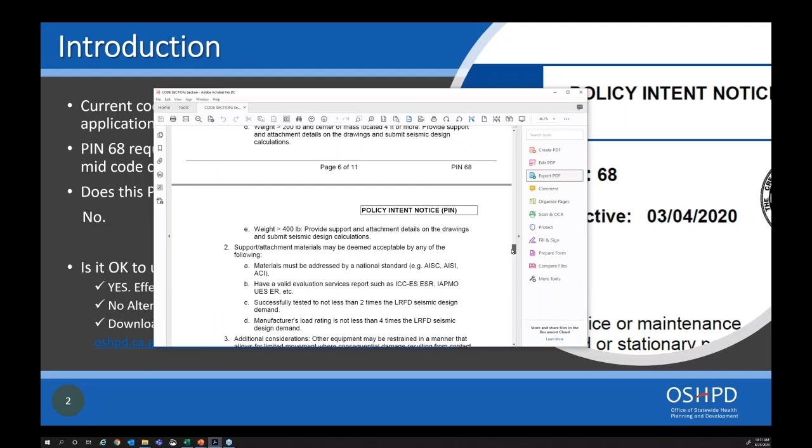So this PIN is not a short one. It's about 11 pages long. So you will see the new definitions, the requirements tied to those definitions, and the explanation of each definition in detail in this PIN, as well as, let me go all the way to the end, there are charts and graphs.

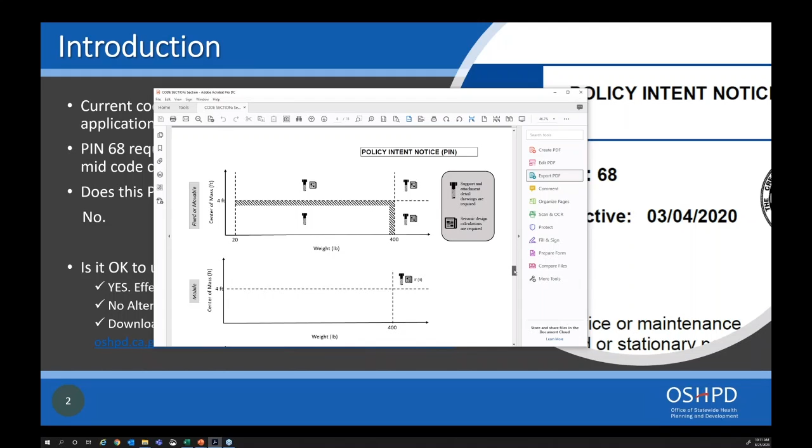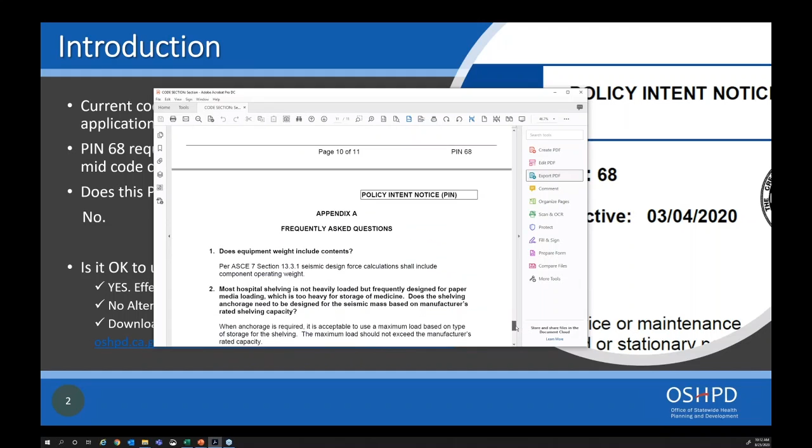So in today's presentation, I will be showing a bunch of these things. The presentation covers all these figures and does not show anything else. So everything in the presentation is actually in this PIN. Also, the example equipment schedule as well as the frequently asked questions that I will explain more in this presentation are at the last page. So this is the structure of the PIN.

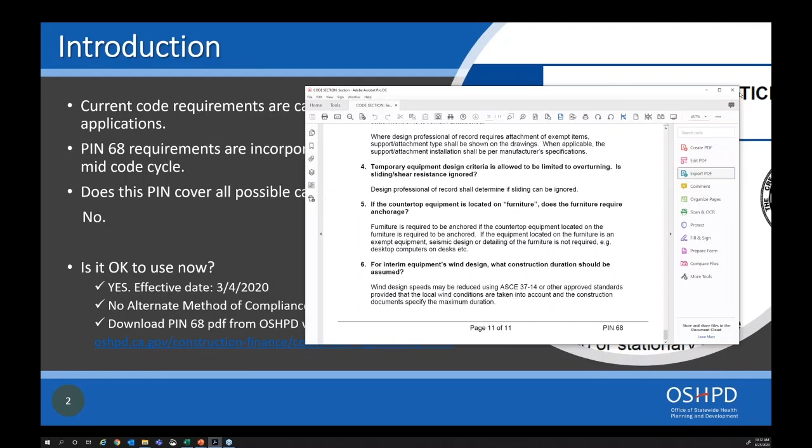Now, just jumping right into the classifications. This PIN brings in new classifications: fixed, movable, mobile, countertop, other, temporary, and interim. You are familiar with fixed, movable, mobile, and temporary. In order to holistically approach the equipment issue, we first revisited the definitions of fixed, movable, and mobile, and we started carving out the definition and scope into countertop, other, interim, and temporary.

So I will not touch the past definitions. This presentation only looks at the PIN. I will not attempt to explain what the old codes tried to say. We're just going to move forward. Now, these classifications are the backbone of what we are trying to do in this PIN.

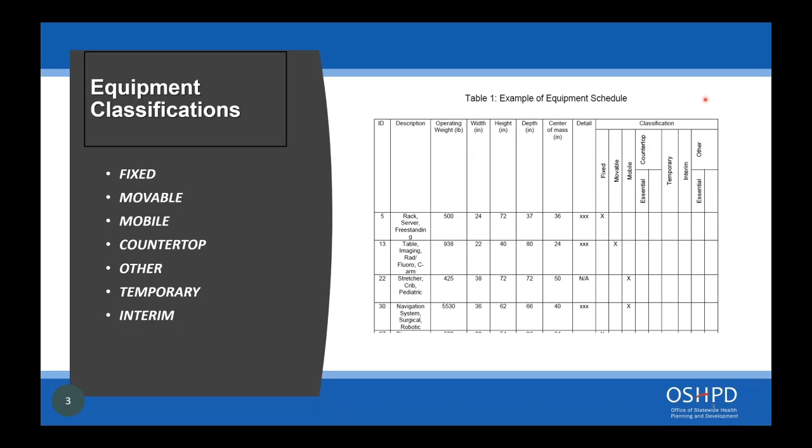So you have the weight, width, height, depth, and the drawing detail. And here is the classification breakdown: fixed, movable, mobile, countertop, temporary, interim, other. And I will come to the definition of essential in a minute. I will re-emphasize this during my presentation: it is very important to put the schedule in the construction documents so that everybody agrees and there won't be any misunderstanding down the road.

As I mentioned, in the new classifications, there are some more terms, such as essential and patient care vicinity. Essential is a new term, and it's basically determined by the facility in consultation with the design professional. Let me read the definition. Essential equipment means equipment the failure of which will significantly impair operations during or after a disaster. The facility shall determine which equipment is essential. So this is where it gets really different than any previous code cycles.

Essential equipment shall also include equipment that is required to provide the basic services of the hospital as defined in this section. So we added this sentence because as a minimum, the equipment that is under the basic services should be under the essential. And this eliminates the question: if the facility says we have nothing essential, then we're going to be pointing out, well, at least you've got to have the basic services of the hospital covered under this essential equipment. And I will come to the point of what to do with essential equipment when it comes into the picture and when not.

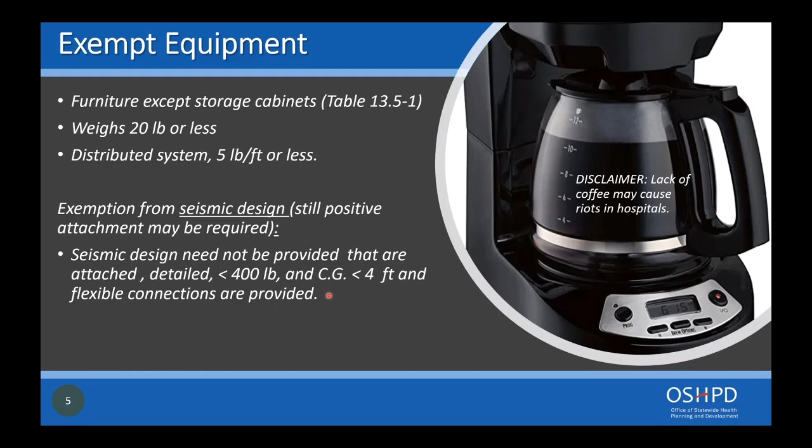All right, the most discussed equipment type classification is really exempt. So we did not change the ASCE 7-16 exemption items. So I'm going to just say the same items, such as furniture or equipment 20 pounds or less, and distributed systems 5 pounds per linear foot or less. ASCE 7-16 also says that these are exempt from seismic design, so you may still need positive attachment. And the famous less than 400 pounds, less than 4 feet, basically gets you out of the seismic design, if flexible connections are provided. So we haven't changed that.

So PIN 68 takes this exempt equipment language one step further. Okay, if it is exempt, what do we do now? What if I show it on the drawing? What if I don't? So we went into that next step. If an exempt item's seismic bracing is shown on a drawing, engineer design and calculation is not required. So if you identified equipment as exempt but still wanted to show it in the drawings, we're not going to ask for calculations. It's already an exempt item.

So let's say you showed it on the drawings, but for any reason you wanted to change the anchorage, change something. That change will not trigger an ACD. So this is an important note to make. For exempt equipment, we're going to treat that as a non-material alteration.

So if it's exempt equipment and the seismic design is not required, well, for example, can you use Velcro? What we mentioned in PIN 68 is that support and attachment of exempt equipment shall be determined by the facility and/or design professional of record. So if the design professional comes back and says, I want to use Velcro to do this, that's up to the design professional.

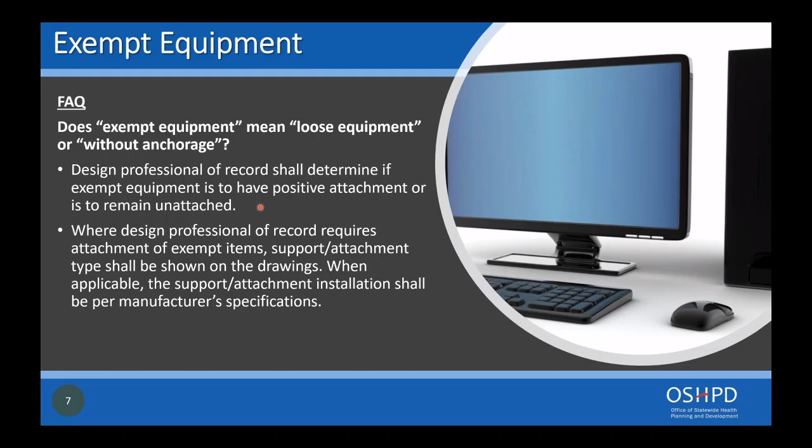So there are certain exempt equipment items where the design professional of record requires attachment. They say yes, this is exempt, but we don't feel comfortable, we need the attachment for this. In that case, support and attachment type shall be shown on the drawings so that we can inspect that installation and make sure that the contractor installed it the way the engineer wanted to begin with. And when applicable, obviously, the support and attachment installation shall be per the manufacturer's specification.

We will also discuss exempt equipment within some other classifications, but I will just go through each classification and give some examples.

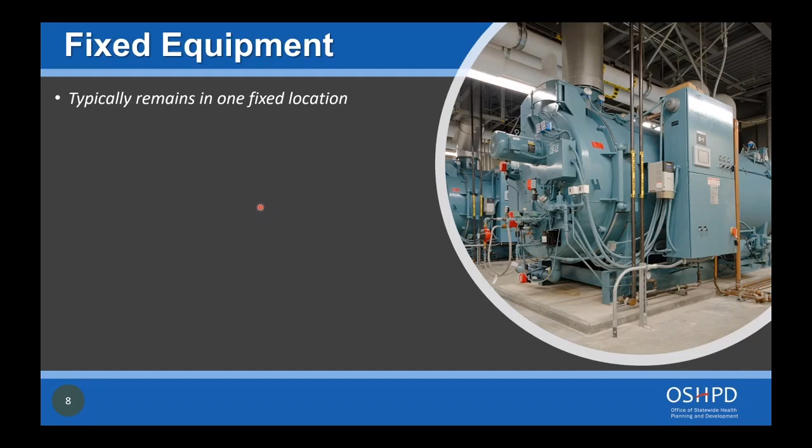So the first one is fixed equipment. Typically remains in one fixed location. That's question number one. And connected to utilities—I'll be mentioning utilities quite a lot in this presentation. We excluded and mentioned this in the pin: it excludes equipment with plugs for 110 or 220 volt receptacles having a flexible cable or cord.

Coffee machines are a prime example of equipment that is not fixed, because some machines, like refrigerators, have little plastic tubes just tied into the system. We do not consider that as utilities. So to make that more official, we mentioned that equipment with pipe tubing less than half an inch with a shut-off valve is not under fixed equipment.

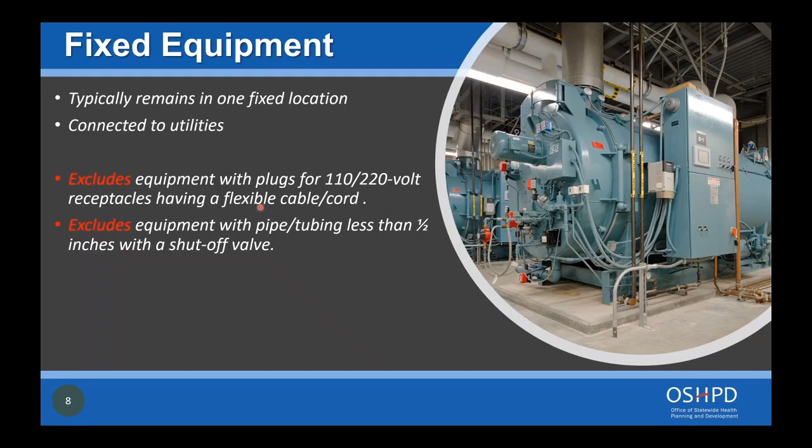So, movable. Some people when they see 'movable' think mobile. So the definition of movable, we further fine-tuned it. It's essentially fixed equipment, but it's periodically moved to facilitate cleaning or maintenance. Just like fixed equipment, this movable equipment remains in one location.

It's acceptable to use reattachable anchors or restraints, because you need to pull it and then put it back, so you need reattachable anchors. Obviously you need flexible connections, because if you're tied to a gas line, you've got to be careful. On the support and attachment materials...

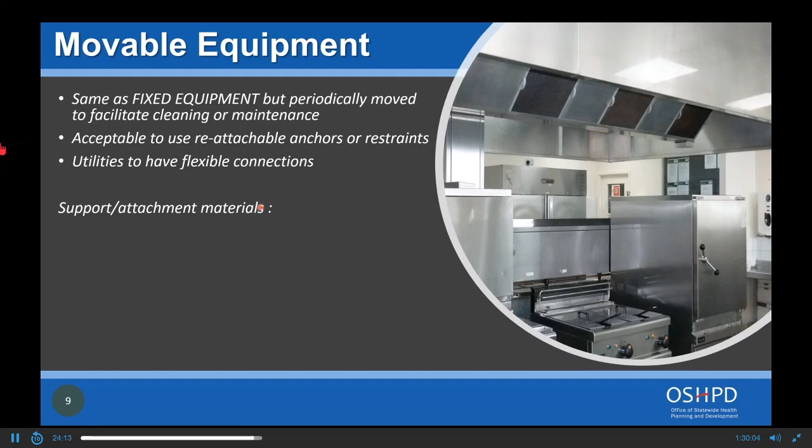The design professional of record can use just the national standards, or you can use ICC reports, IAPMO, valid evaluation services reports.

Now, when it comes to further flexibility, we added the evaluation of the support and attachment by testing—meaning whatever attachment you're using, if you test it at 2 times the load, then we will call it good. So this is new.

Let's say you don't want to test the support and attachment, or testing isn't practical. You may use the manufacturer's load rating in a catalog, but let's say the catalog doesn't have any documentation or background to back that value. So what we're going to allow is we let the DPR take the catalog value and divide it by 4, then compare it with the project-specific loading. In other words, 4 times the load coming from the project should match the manufacturer's catalog value.

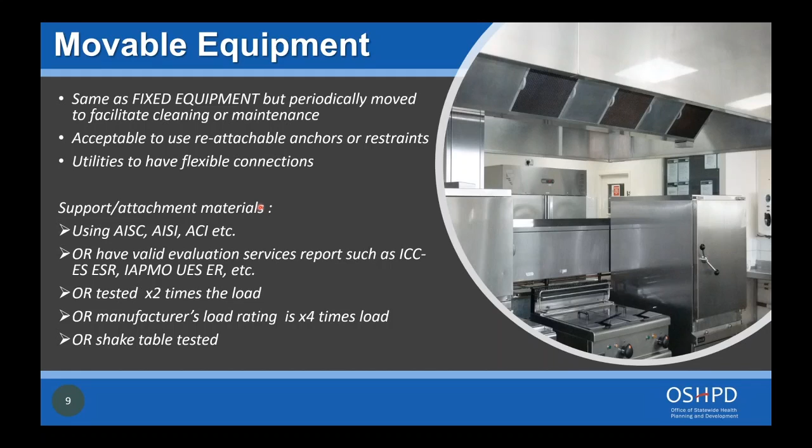So what's in common between fixed and movable? Both have utilities, such as gas line piping. If you have lab equipment that doesn't have any water or gas or anything, that is not movable equipment—that's something else. Movable equipment has utilities in it, just like fixed. I want to make sure there's a distinction: both remain in the same place. An example would be a gas stove, pulled for cleaning, for movable. Lab equipment with a 110-volt plug, periodically pulled for cleaning, is not a movable classification.

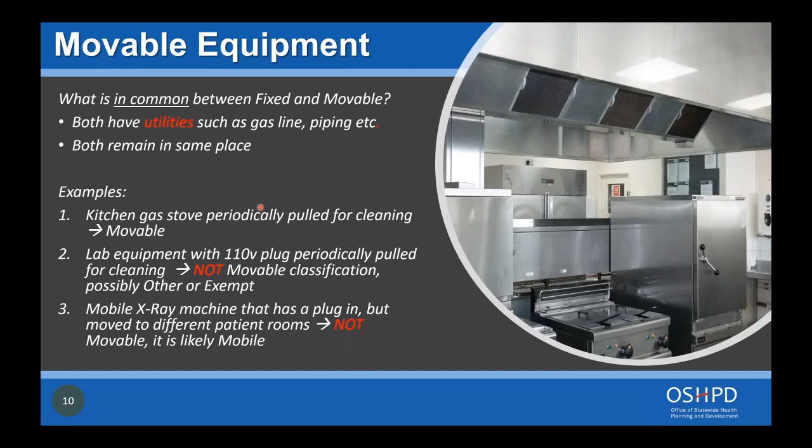What about the mobile X-ray machine that is moved around? That is not movable, it's mobile—so there is a difference. As I mentioned earlier, in the pin, this chart is in the pin.

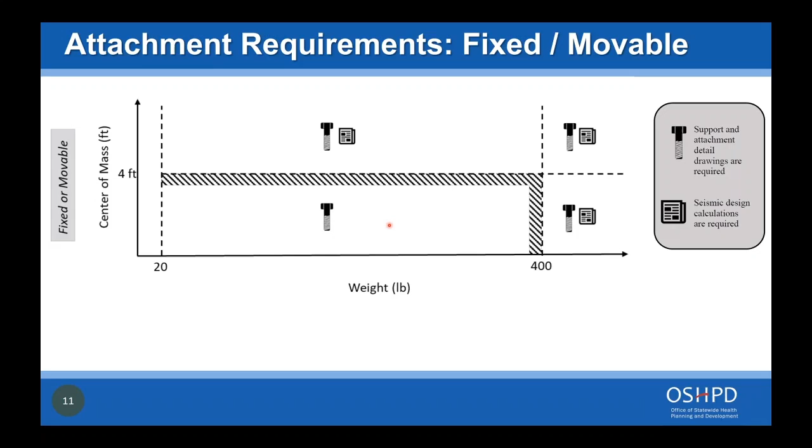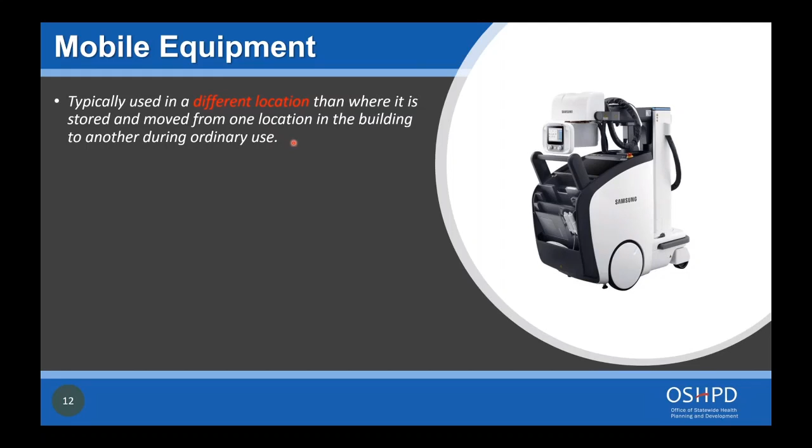Coming to mobile, the definition is typically used in a different location than where it is stored, and moved from one location in the building to another during ordinary use. So if you have a piece of equipment and you put rollers under it, that doesn't make it mobile. The idea is: is it used in different locations?

One question I get a lot is, how can we determine mobility? There was an 8-hour rule in the past. There is none with this PIN. So the 8-hour rule is no longer there. It's not going to be enforced because it's not part of the requirement. So if for some reason this comes up in the field, is there an 8-hour rule? The answer is there is no 8-hour rule.

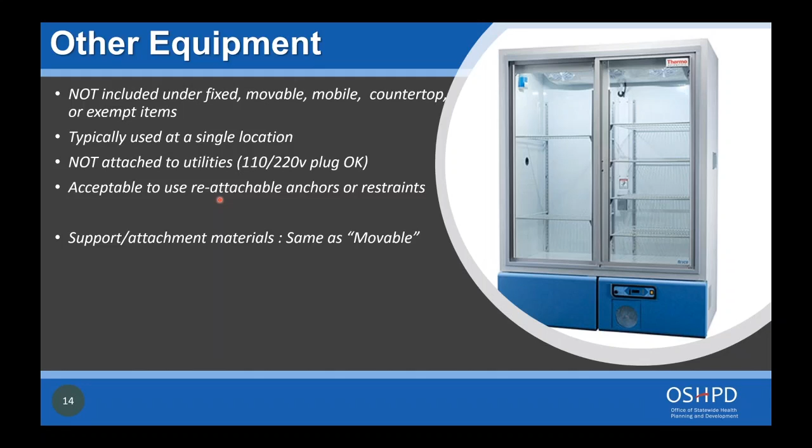So let me move forward with this, and I will show all these requirements in a chart. At first it may look pretty crowded, but once you know the center of mass and weight of equipment, you just come to that point and read the requirement. This should give a clear direction on what the requirements are, depending on what the sizes and weights are. So let's start with the weight: under 20 pounds, other equipment is exempt.

When you are over 20 pounds, and if you are under 4 feet, the anchorage requirement comes in if item 2 is there. So let me repeat that: if you have, let's say, a 50-pound equipment with center of mass 3 feet, you come here and say okay, first I need to look at item 2. The anchorage is required if the equipment could fall within the patient care vicinity, the one that I mentioned early in the presentation, 6 feet to the side. So if you are near that patient care vicinity, you need to anchor it. Also, you need to anchor it if the equipment could fall and block a required means of egress. So you need to make sure that you are not in that means of egress area, and talk to architects to confirm. If you are there, you need to anchor it, but you do not need to provide calculations because that symbol is not there.

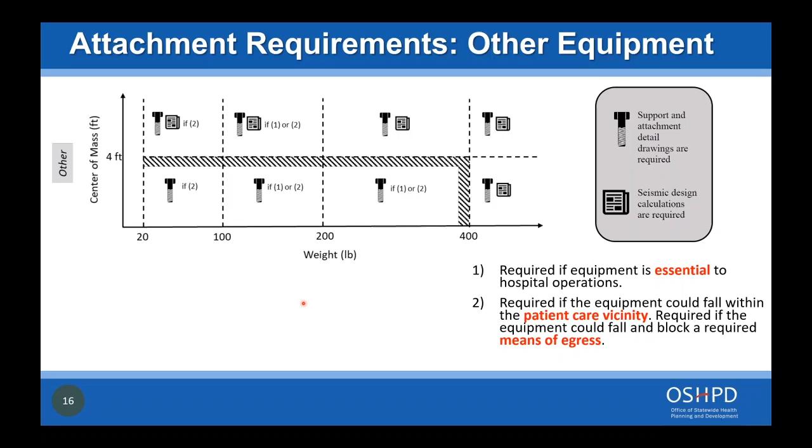Being on a countertop does not get you out of the requirements for other categories, for example fixed, mobile, or other equipment. Meaning that if this piece of equipment has a gas line into the wall, then you are subjected to the same requirements as fixed equipment. Again, you do not want any issues with the utilities.

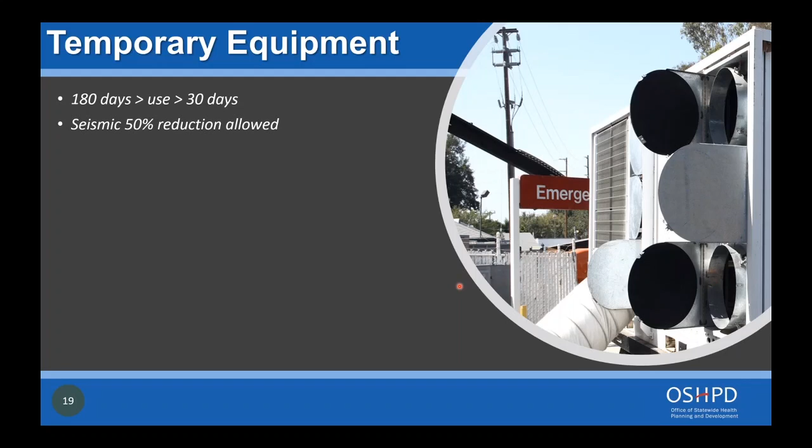Just as the CAN allowed in the past, a 50% seismic reduction is allowed. What's different is we added wind speed reduction in the forces in this pin. So ASCE 37-14, basically, depending on the duration of your equipment, allows some reduction. The longer the duration gets, the less reduction you get.

Another difference between what was allowed in the past versus this pin is that we are accepting the use of ballasts, counterweights, and things like that for overturning for temporary equipment. A lot of times there's really not a good place to provide anchorage down, and you do not want to put a foundation and all that for a tiny temporary piece of equipment, so we're going to accept ballasts for overturning.

What about the supports and attachments coming into temporary equipment? The seismic design is not required, and this is not new — this was in the CAN, so we did not change that. You still need to provide the gravity support and all that, but the seismic design is not required.

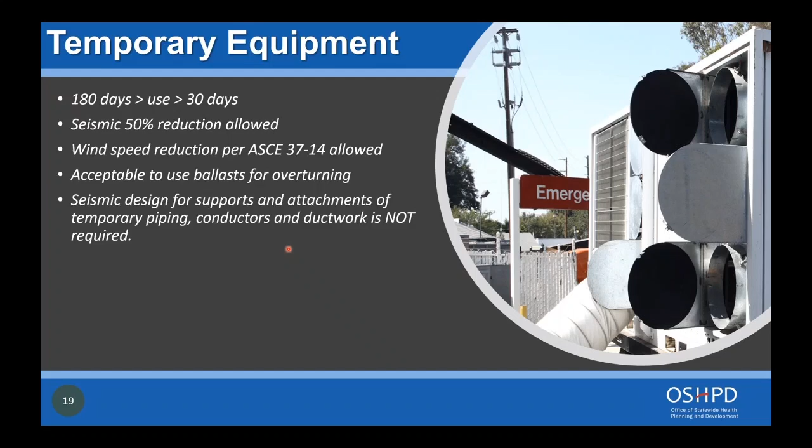Interim equipment — this is again a new definition. This is really for equipment used during construction. A lot of construction lasts more than 180 days, sometimes years, but the contractor needs that equipment for whatever reason. A lot of times, since it's more than 180 days, it's not under temporary, and it quote-unquote becomes permanent. We do not want that situation.

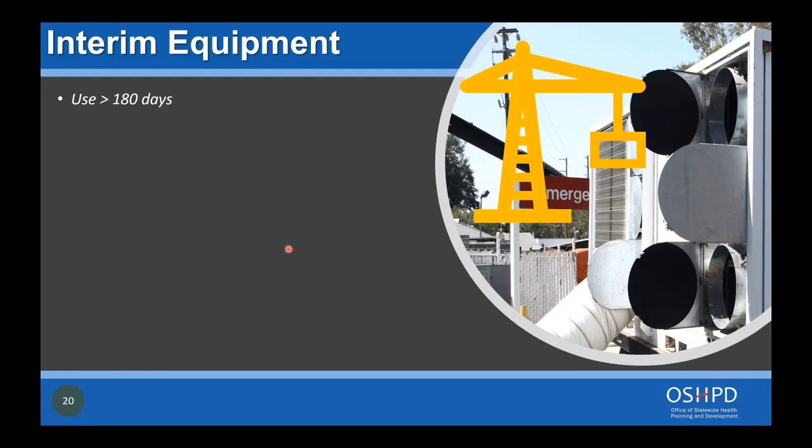That's one of the reasons we introduced interim equipment. It's only allowed for the duration of the construction project that it's related to. So those quote-unquote long-term pieces of equipment will become non-compliant right after the project is finished, so you need to do something with that equipment.

We did not allow seismic reduction because this is a bit more long-term, however we allowed wind speed reduction. So those are the parameters for interim equipment. Similar to temporary equipment, for the supports and attachments, we are not requiring seismic design.

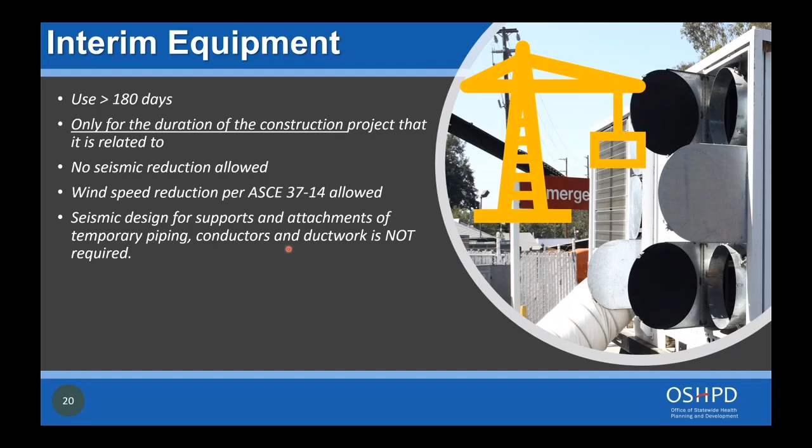One other frequent question is shelving. For example, there's a lot of shelving that is not heavily loaded, not like paper media, and when you add things up with the minimum PSF that is in the code, it really becomes not workable. Meaning I'm only putting hardly 1 pound per square foot, but the rating of the shelf is 3,000 pounds. Now I have to provide huge anchors just to carry a total of 10 pounds. So that doesn't make sense.

So we thought about how we can approach this. We basically said when anchorage is required, it's acceptable to use a maximum load based on the type of storage for the shelving. The maximum load should not exceed the manufacturer's rated capacity.

So what this means is there are certain areas, let's say pharmacy, certain shelves, the design professional of record can say that for this type of use for these shelves, according to their expertise, 5 PSF is the load for this use area. You show calculations according to that, and we will accept that. What we won't accept is a typical detail like a shelf that just says 5 PSF, where we don't know where they're going to use it. That's not what we are talking about.

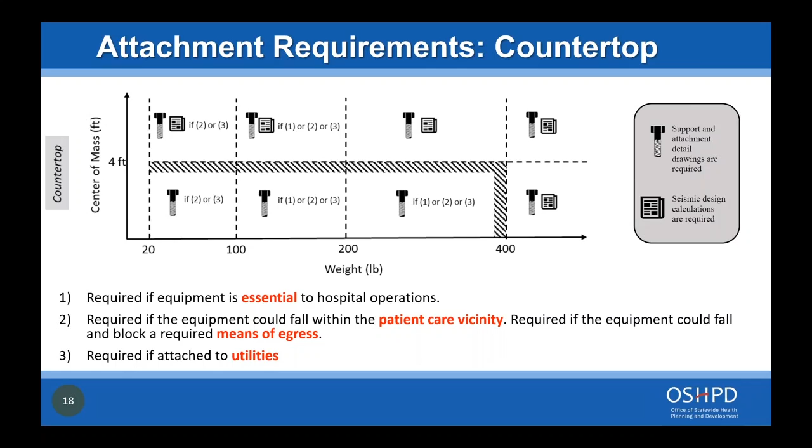So it is actually defined in the PIN. I'm getting feedback, an echo actually. So it is determined by the facility and the design professional of record. It has to be communicated clearly between the facility and the design team. And there is a minimum. So let me go back, since you joined late, I think that you may have missed the first definition.

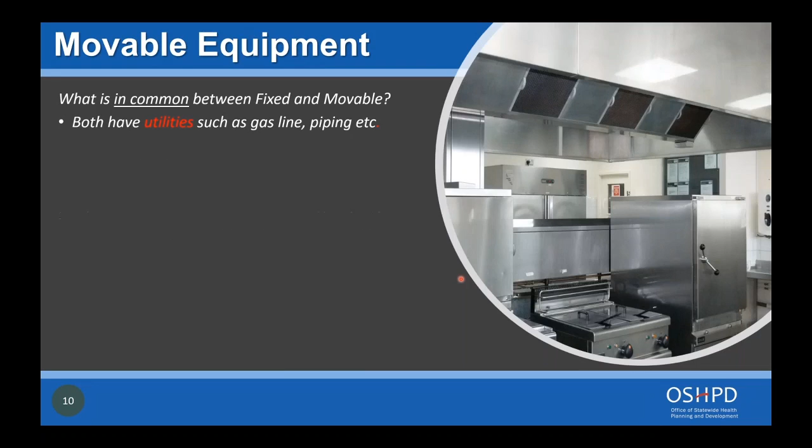And this is very important. So it's defined here. There are minimum places where it's about basic services, so those will be rolled into essential. Again, keep in mind that essential does not come into picture for fixed, movable, mobile. Those are not considered. The only time it comes into picture is on countertop, other. So all others, you won't have to deal with whether it's essential or not.

And quite frankly, the essential discussion comes into picture when really there's a discussion whether something needs to be anchored or not. But it is very important for the design team to have a clear discussion with the facility. Hopefully that answered that question.

Caesar, you want to go to the next question? Yeah, I'm sorry, Ali. The next question is, for the now allowed testing of anchors of movable equipment to 2 times the load in absence of the ESR, is that 2 times the load testing requirement twice the demand on the anchor or twice the allowable capacity per manufacturer's literature?

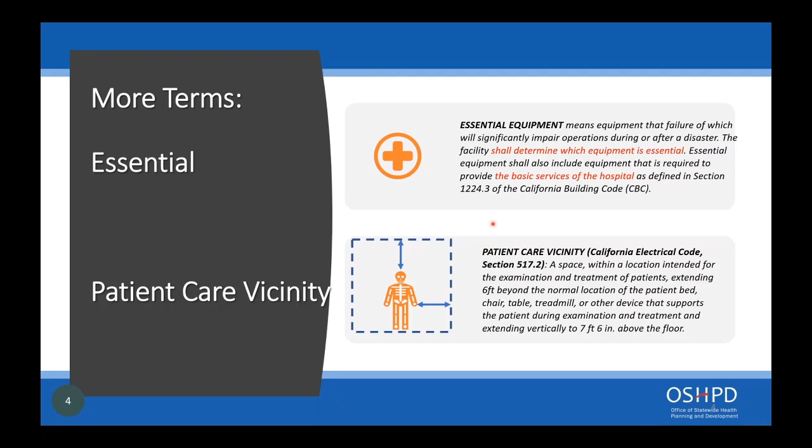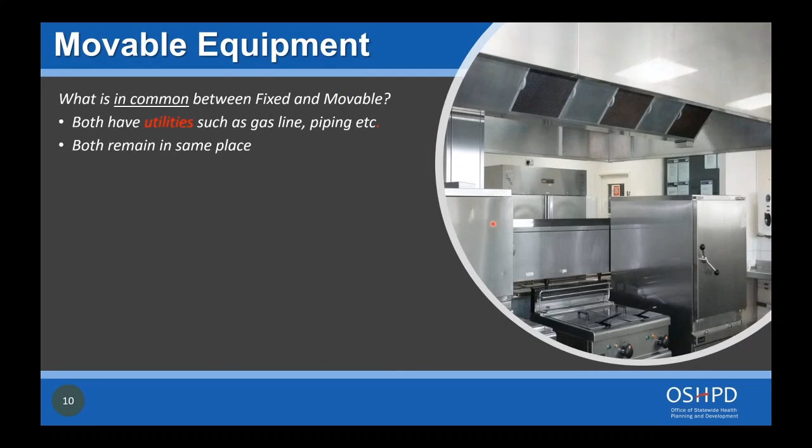Okay, let me quickly go to there. If the design professional says that that equipment is used in different places, it's a mobile equipment, then if you are here, you do not need to provide restraints. So if that equipment, which I know what you're talking about, is not over 4 feet, over 400 pounds, you are most likely there. It's not required.

Okay, perfect. I just want to clarify that, did they say anesthesia Pyxis cart? Correct. If it is truly mobile, then it's not required. That's where I was going. You're looking at truly mobile. Yeah, I mean, Pyxis machine. If it remains in one place, then it's not mobile. Correct, I agree with you. Typically, you don't see Pyxis machines moving from room to room to room. Yeah. The question was it was being moved. Right. And that's where you get back to truly mobile.